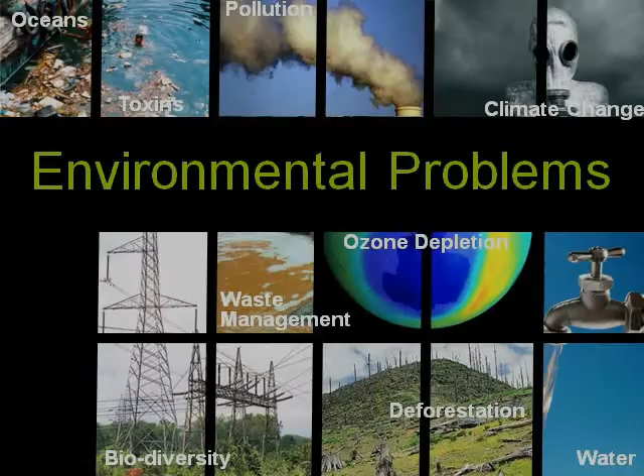Sustainability principles are as follows: conserve energy and water, maintain healthy indoor air quality, minimize the use of toxic and hazardous materials, waste, reuse, recycle, reduce, use renewable, sustainably harvested natural materials and consider biodiversity protection, minimize pollution of air, land, and water, encourage environmental stewardship by suppliers and manufacturers, and lastly, ensure durability.

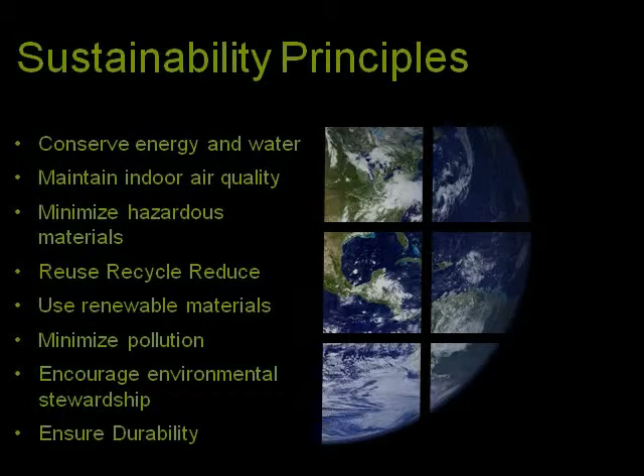The Energy Information Administration predicted in 2008 that world energy demand would increase 50% by the year 2030. In the U.S., when coal is burned at the power plant, only 31% of the energy produced by the coal gets to the electric meter. This is documented by the Electric Power Research Institute.

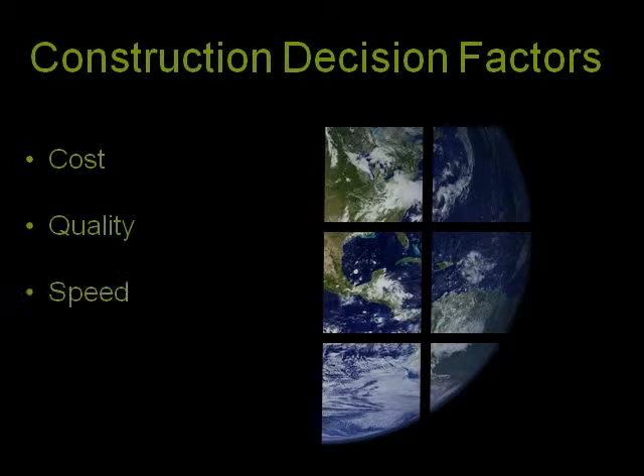Construction project decision factors are: number 1, cost; number 2, quality; number 3, speed; number 4, sustainability and performance. Design, supply chain, production, and living units are all part of a sustainable process.

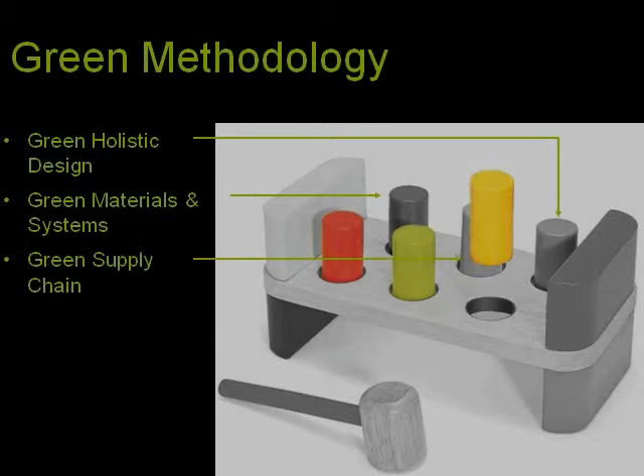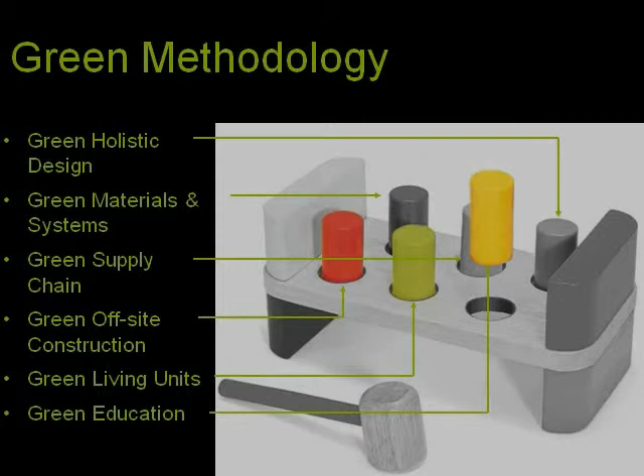Green methodology: number 1, green holistic design; number 2, green materials and systems; number 3, green supply chain; number 4, green off-site construction; number 5, green living units; and number 6, green education. Design-build collective intelligence requires all the players to be on board from the start.

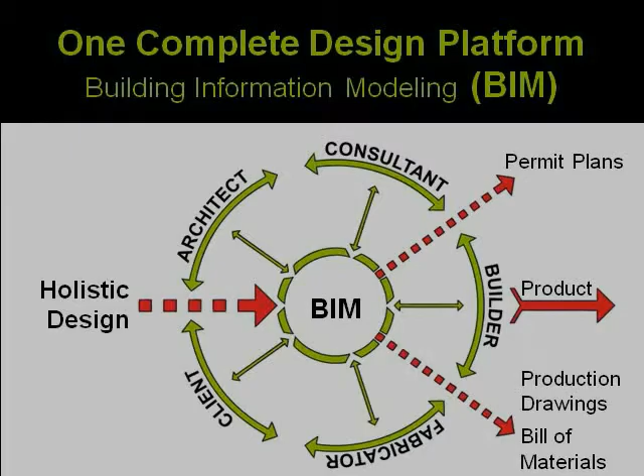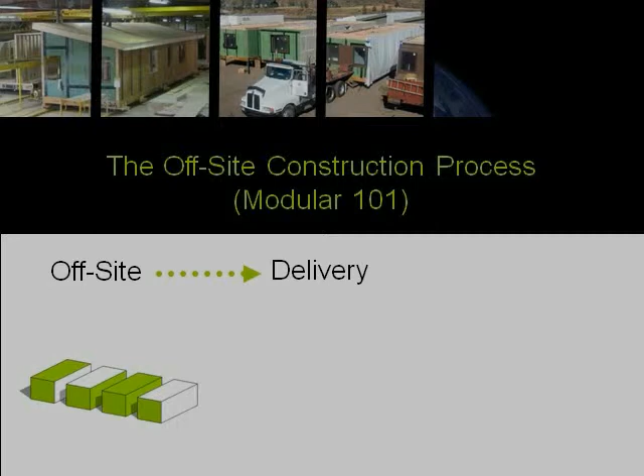One complete design platform is building information modeling, and it enables all the details to be captured in every set of the plans from architectural to production. Off-site construction process is production, transportation, and setting the modules. The project above is a 25-unit project which was constructed in half the time and is a Platinum LEED pending project.

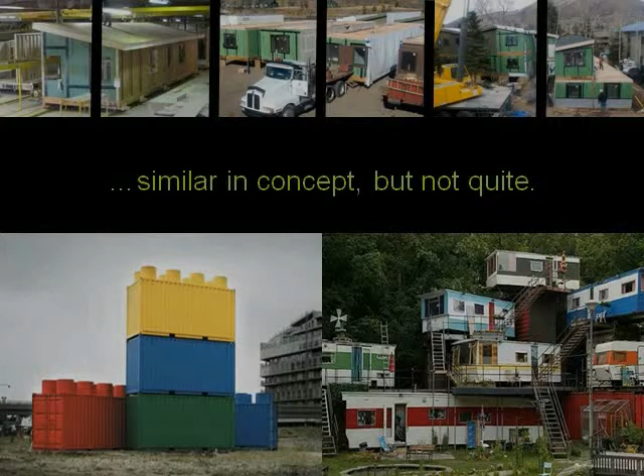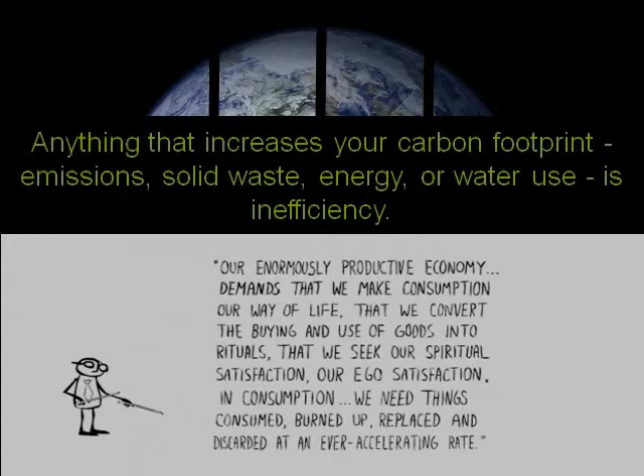Our building system reduces the use of energy, waste, and pollution. Everything coming out of a production facility is product, byproduct, or waste. Anything that increases the carbon footprint is inefficiency. Off-site construction generates up to 90% fewer vehicle trips to the building site.

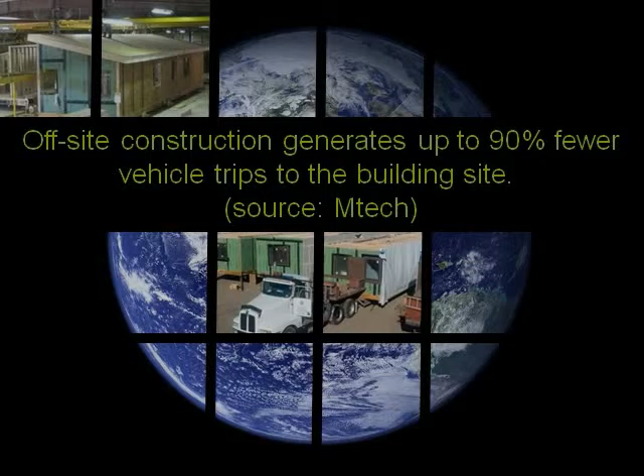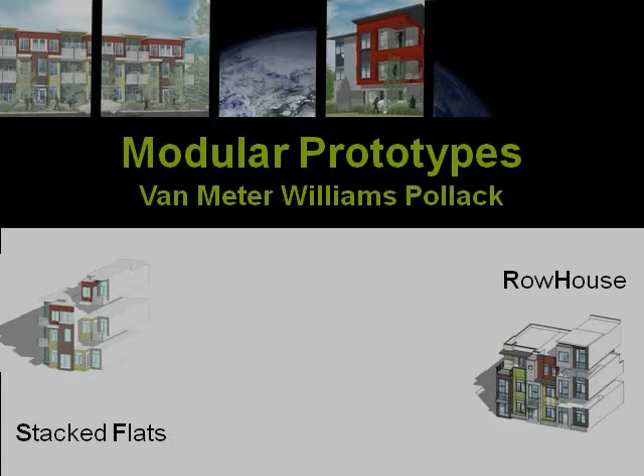Off-site construction offers significant environmental benefits, transportation cost savings, and energy savings. Up to 67% less energy is required to manufacture off-site construction compared to traditional site-built construction. Prototypes have been developed for off-site construction. They are row house, stacked flats, carriage house, and townhouse.

Valencia Gardens is an example of an award-winning affordable high-density project designed by Van Meter, Williams & Pollack. This is a ModSystem SB multifamily prototype design.

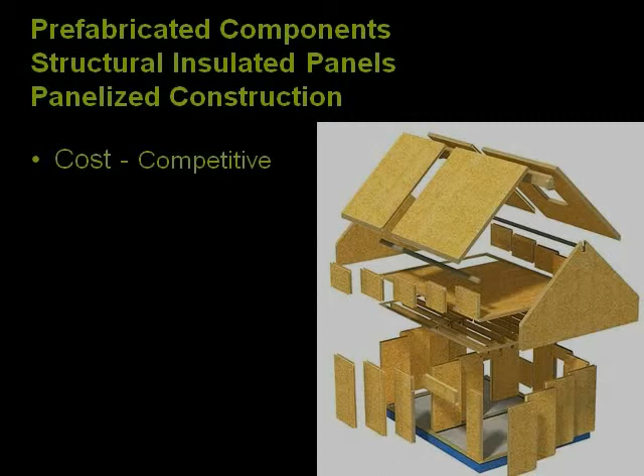Prefabricated components are an integral part of the construction process. Structural insulated panels are one of those prefabricated components. The cost is competitive, the speed is faster, the quality is higher, and it is a much greener product using the prefabricated components.

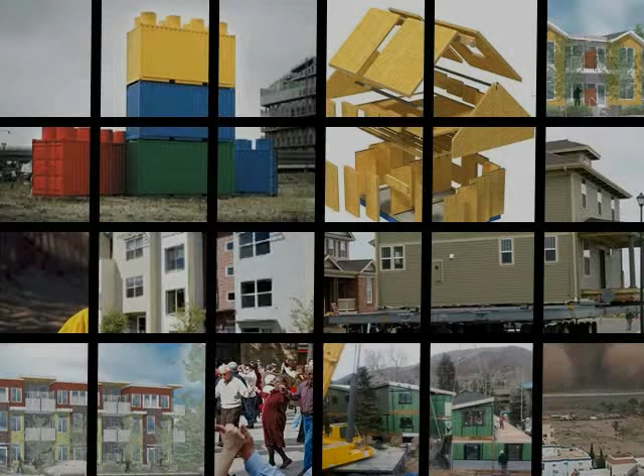To summarize the key points, green is sustainable for the purpose of preserving the earth for future generations. We are connected globally, and the economic crisis has shown us that no one country is immune. Global population growth is primarily urban and happening in developing countries. Buildings are responsible for a large percentage of greenhouse gases and pollution.

Energy not used is energy saved. That's energy efficiency. Our lever is eco-efficient building systems. We do this through collective intelligence, a green supply chain, green production, and green living units. The success of the green building movement will depend more on good teachers than on good builders.

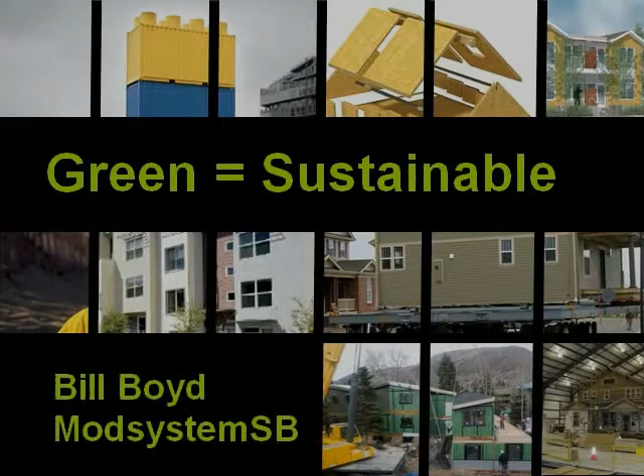Now is the time for action. Our planet will be preserved for future generations by being smart and responsible. Acting as a global civilization will solve the climate crisis faster and more efficiently. We're paving the way to a better world through green building.